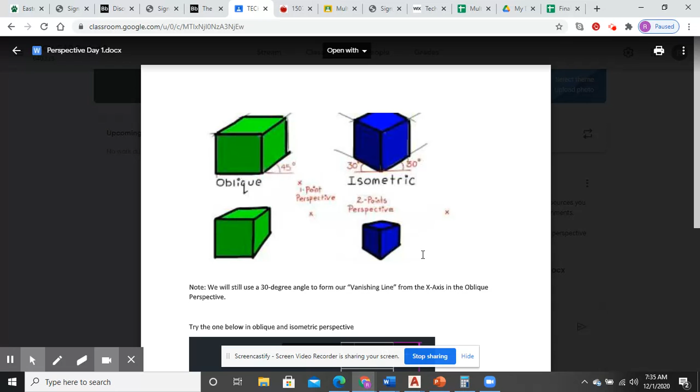All right, so now it's time to get on to drawing your own, trying your own perspective, and doing something a little bit maybe not trickier, but just more visually interesting than a cube or a rectangular prism. So I drew this one just in a couple of minutes, this multi-view, and this is a stair step pattern, and this is a real easy drawing to do.

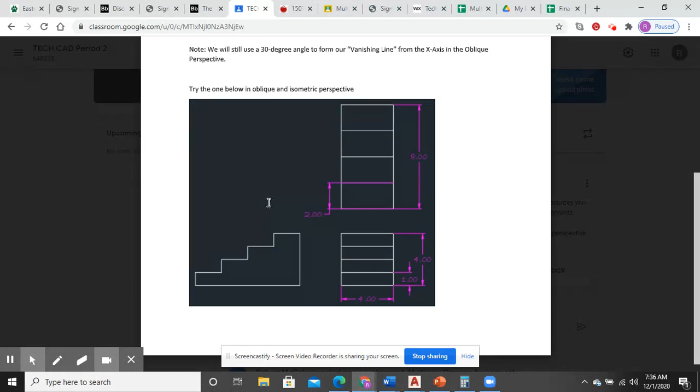I already have it on the CAD document that I'm about to open. But again, to make it easy on yourself so you don't have to keep toggling screens, just do Windows button, Shift, letter S, gives you the snip tool, and you can go and snip this right out of here and take it right over to wherever we're drawing in AutoCAD.

Okay, so get away from here. We don't want that. So now if I were to go Control V, it will show me that right there. Okay, but I don't need to do that because I already have it here.

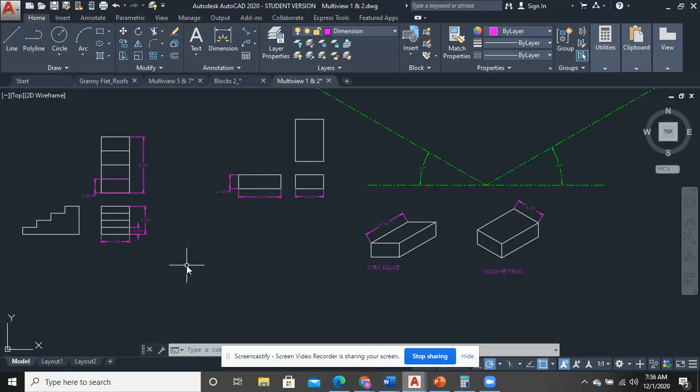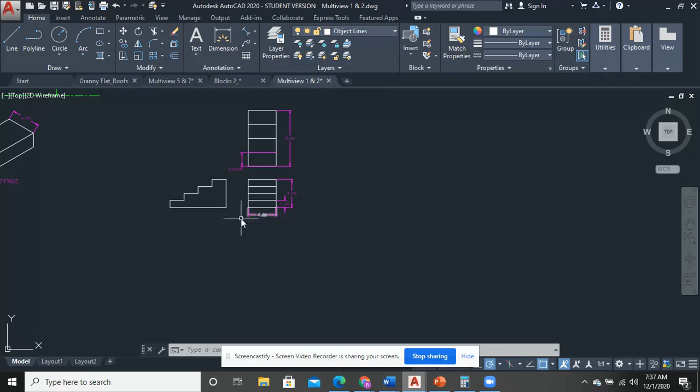So okay, I'm going to copy this. And again, if you think about this, just think smarter, not harder on this. If you think about this really like you're folding origami, okay? Like somebody has given you all of the paper with the lines and it's already been cut and it's already ready to fold. That's kind of the process here.

So first thing is kind of look and see if you can see a pattern to keep things easy. In this type of drawing, at least with a computer, you only have to draw these parts a lot of times just once. So I can see that I have a width of 4 across the front. I can see that each step has a height of 1, and I can see that each step has a depth of 2, right? I'm using the 2 here to tell that, and then the 1 here told me that every one of these is 1, okay?

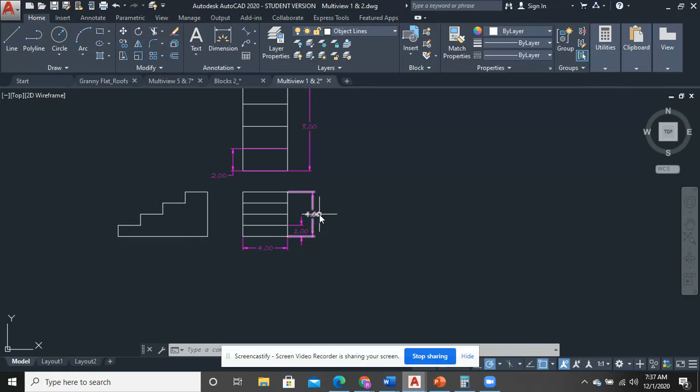And I know even if somebody had left out the overall height of the drawing at 4, I know that 1 plus 1 plus 1 plus 1 is equal to 4, okay? And I know if no one had given me this information, that it's 8 from front to back, that this is 8. I know that 2 plus 2 plus 2 plus 2 is equal to 8.

Okay, so I'm going to attack this from an oblique perspective first, and in order to do that, I will just start with a line that is over 4. Same exact line. I mean, I could copy this line right off the front if it was there for me. And I'm going to go along the bottom now. Okay, and the bottom, remember, is 8. So this is where I have to say at 8 angle 30.

And I realize that my command window is right in front of where you're looking. But I never have to click. I've still had some people and they're like, I'm trying to click down in here. You don't have to click anything in here. Okay. So now I need a height of 4. So I'm going to go up 4.

Now, this is what I would do. I can pretty straightforwardly look at this and say, okay, well, I talked about that these things are over 2, down 1, but you didn't tell me what this angle is. Because if I say, okay, this is parallel to this, is 30, this is putting me to go backwards. I know that it can't be 30, right? I know it has to be 30 past 180, which is right here. So in this case, I could say at 2 angle 210, and then I could just say down 1.

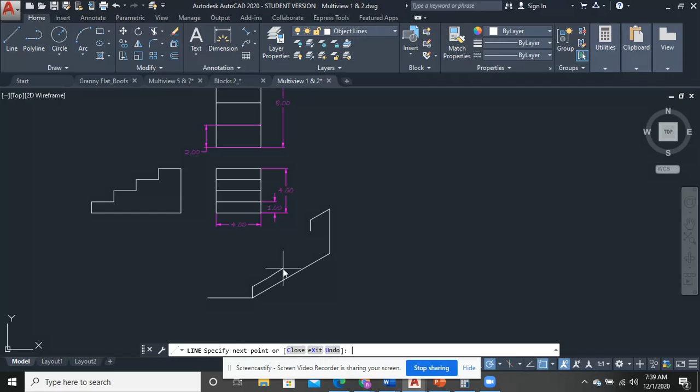But in order to not confuse you or keep it simple, just go back to the other side and go up 1, and then put your first line in at 2 angle 30. Okay? And once you've drawn this, you don't have to keep drawing it. Just copy it. Drop it right there. Copy it. Drop it right there. Hey, look, everything worked out perfect on that. Okay? I'm going to move this whole thing out of the way just slightly.

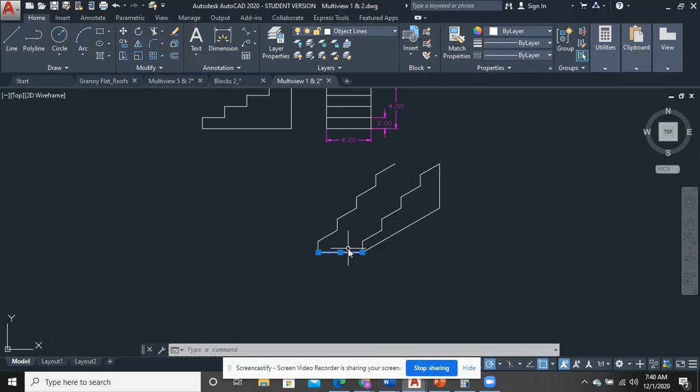Okay? And guess what? This side is the same. So all of this can be taken and dropped right there. Okay? And then, best thing yet is this can be taken and dropped right along the way.

Okay? Got some people upstairs who are really excited about isometric drawing.

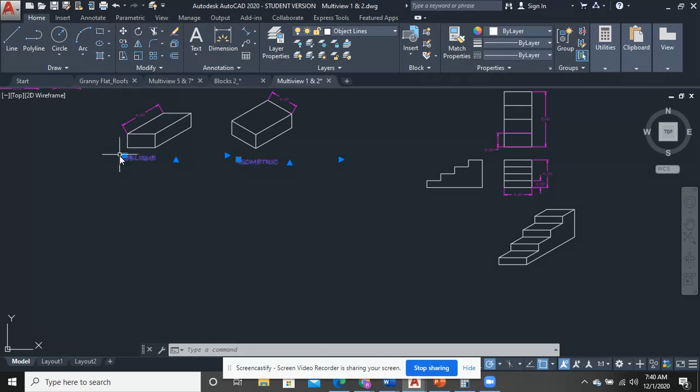Okay, so that's that. And that is our oblique. I'm just going to copy my words here. That's our oblique perspective. Okay. So again, what makes oblique oblique? One face is always built right on the x-axis or parallel to the x-axis. Okay. So what about this side? Well, the cool thing is, look at all the work you've gotten done.

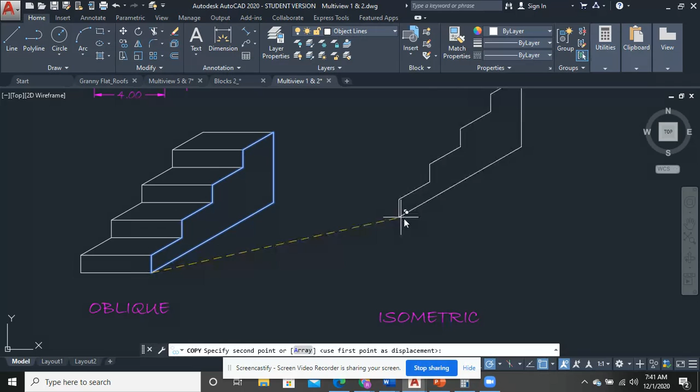So remember I said any vertical line and any line that's going off in the 30-degree direction is good, as long as it doesn't depend on something else. Like this, there's nothing that this one really depends on. I'm trying to think of a better way to explain that, because the right side was drawn first, basically. So nothing on the right is depending on anything on the left, really. So there we go. Okay, so that part's done.

But now I just have to get this 4-inch line going over this way, right? 30 degrees relative to the x-axis on this side. So in this case, I'm going to say at 4, because it's a specific distance, angle. What would that angle be? 150, right? 30 degrees behind the x-axis on the left side.

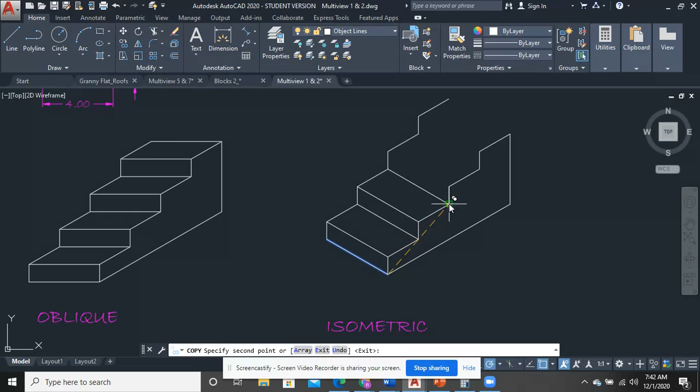And check this out. Now I can just go ahead and copy it, drop it, enter, and just go copy and drop it like it's hot, all the way down. Drop it like it's hot, drop it like it's hot. Boom. Piece of cake. This whole side is done.

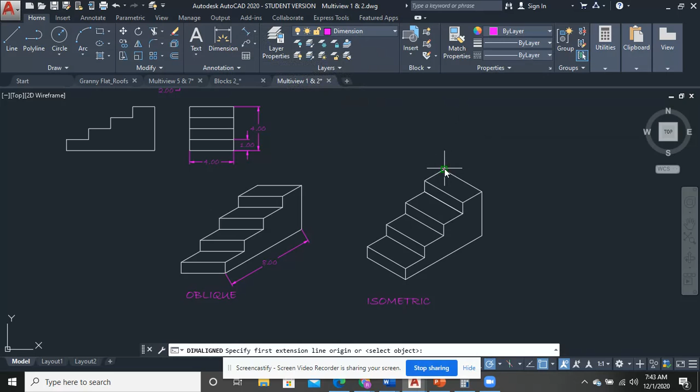And so this is how I'm going to make people watch my videos this go around. The only way you'll know what to dimension is by watching this. So what I want to be dimensioned on this one is the width of the top step right there, and actually, you know what? No, here's what we're going to dimension. The depth of the object from front to back on the oblique side. And the width of the top step on the isometric side. So if you are watching this, then you know exactly what to do.

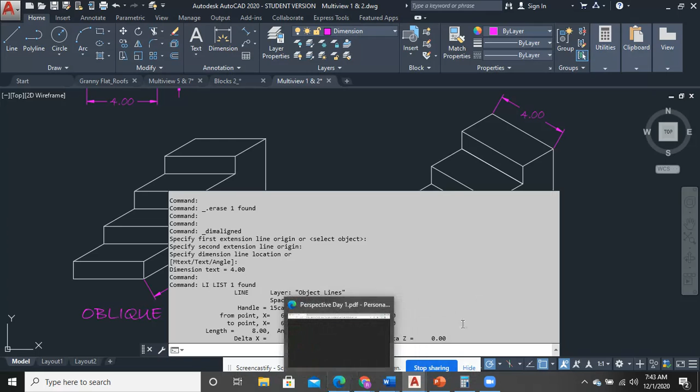Oblique, isometric. If you're ever unsure that that angle is the correct angle, select it, type in LI space, and guess what? It shows you right here that the angle is 30 degrees, okay? If you want to double check yourself, click the line. For some reason nothing's clicking. LI space, 150 degrees. So that's it.